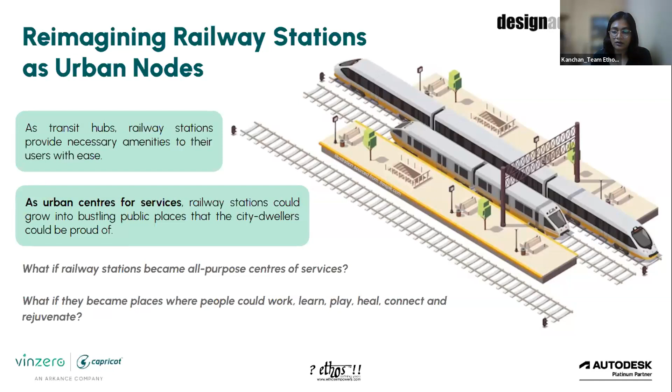Moving on, we have to reimagine railway stations in X, Y, Z cities, basically tier 1, 2, 3, 4 cities, though the nomenclature has evolved a bit. We have to reimagine the railway stations in our cities beyond being just transit hubs and more as nodes of urban activity. Because there is so much footfall and so much coming and going of all kinds of people from all different places throughout India, we have an opportunity to transform them into something that could just elevate the city into something we have never seen before.

So we fill in the gaps in the town's life with facilities such as education, healthcare, workspaces, hotels, leisure and entertainment related services, commercial developments, etc. For education, maybe we could imagine something like a night school happening there, or maybe even a regular school, college, or libraries. For healthcare, we could have full-fledged clinics or even hospitals that could work in conjunction with facilities like the Smile Train or the Lifeline Express, which used to run a few years ago.

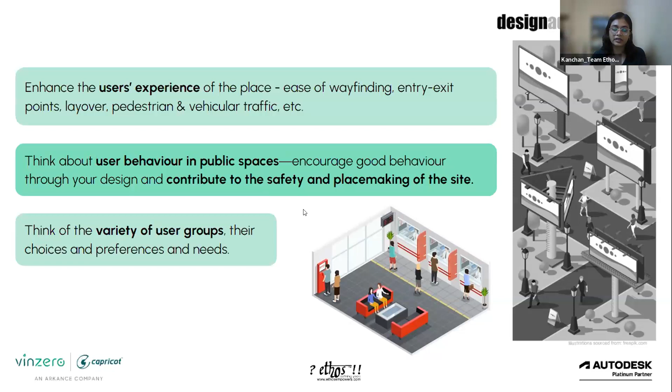Now, how do we enhance the user's experience? We discussed making wayfinding easy for them, the entry exit points and all of that. But we also have to think about how we can influence user behavior in such public spaces. How can we influence them to behave in a certain manner, such as maintaining good hygiene and not throwing trash everywhere, or making a place safe and accessible for everyone? What are the different user groups that will be using a certain space, and what could be their choices, preferences, and needs?

As far as the building's identity is concerned, we should try to encourage and adopt the local cultural heritage and the architectural identity of the place. Some places have a really strong cultural identity associated with their buildings. Maybe we could imbibe and embrace that.

You also have to always make sustainable choices, because sustainability is not a concept or an add-on, but a must for us these days. And these could be included in the project through walkability, net zero cycles for energy and water, and efficient management of waste.

Also, with this competition, you are allowed to define your own program and functions, such as what kind of activities you want to include. You could have only the hospital in conjunction with the railway station, or maybe a mix of everything at one place, which cements it as the go-to center for the residents of that city.

The spaces should be accessible and inclusive. No one should feel like there is a barrier to them, or that they are not able to reach certain spaces.

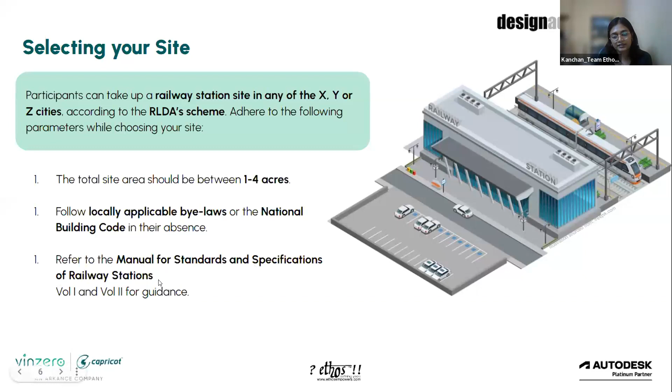For some frequently asked questions: is there any registration fee involved for the competition and workshops? No, there is no registration fee at all, it is completely free. Can postgraduate students take part? Yes, postgraduate students as well as undergraduate students can take part, who are enrolled in courses in architecture, design, or civil engineering.

Can the team members be from different colleges? Yes, inter-college teams, inter-batch teams are also allowed, and even interdisciplinary teams, such as at least one architecture student and the other two from different fields, either design or civil engineering, are allowed.

Can we define our own area program? Yes, we encourage you to develop your own area program according to the needs of the site that you've chosen.

In absence of local bylaws, which standards should we use? Like I said, the National Building Code is to be followed in absence of locally applicable bylaws and site regulations.

When will the workshops be announced? You will be notified via email after registration. So all the registrants receive an email whenever a new workshop is going to happen. So you should register now.

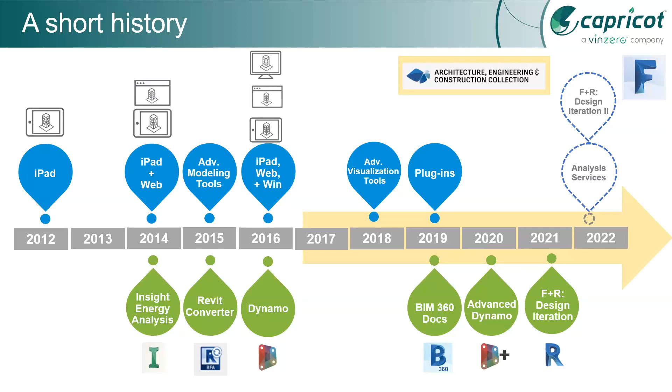So basically, who is going to utilize FormIt? Especially, as I said, in 2012 Autodesk launched the product meant with one theme - that the architect is going to conceptualize the thing from the initial period of our design. So the designer who comes with the sketching environment can utilize this product in the ecosystem.

Since you know that when you are going to design any kind of building, you'll have to design it conceptually first. So the first product that comes into our building life will be FormIt - the sketching environment takes place in FormIt. Then the second thing is informed design exploration. Now what do you understand by this? We know how our environment is going to be endangered by a lot of things.

So we have to cultivate some important steps for doing this. Analysis plays an important role here to compute your integrations, whatever design you are going to be presenting for your client. This third one is seamless integrations.

After the COVID pandemic situation, we all got to know that it would be very difficult to sit in the office and start the work. Earlier we were thinking it would be difficult to sit inside our home and do the work. Now the situation has been totally opposite.

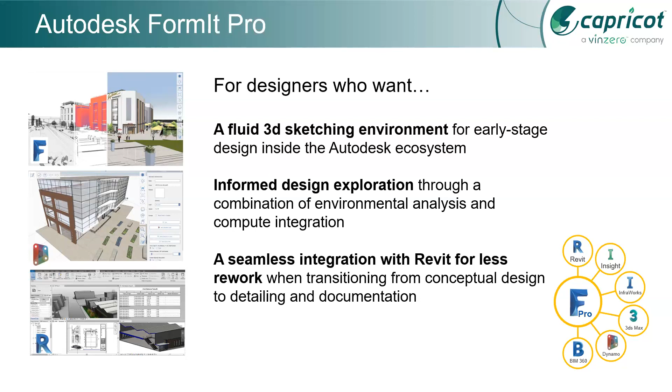So in FormIt 2022, we have a lot of things coming into our path. One is FormIt has been made available in many languages. Level transfer from Revit to FormIt is now possible. Dynamo integration with the 2.12 update is available. Dynamo length inputs units can be used. Since 2015 and 2016, Dynamo has been integrated with FormIt, but they have introduced some of the tools right away for length.

Now you can do animation plus video export here. Today, in detailed design, people are going to export high quality renders or high quality video animations.

But what if I want this in my conceptual design? In a conceptual design, somewhere on my screen, I want a video for an animation so that I can impress my client or my stakeholders to get them to invest more money into the technology, so that I can give 100% of my potential to my design. So animation and video are now possible inside FormIt, even when you are at the conceptual design stage.

So what are the things you are going to get here? You'll get advanced modeling. You'll get environment analysis. You can get FormIt plus Revit integration. You know Revit is a far wonderful product, so it's going to come with FormIt with a whole bunch of BIM.

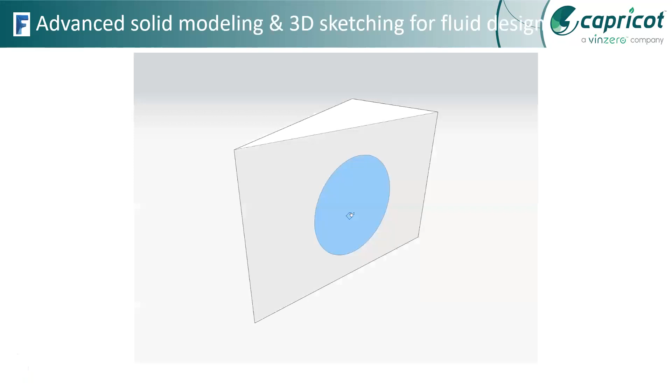For example, if you want to make a circle or a little bit of a push pull, you can do it with a very additive and subtractive mode. You can see how easy it is to do this with the subtractive or additive part, right? It can make multiple push pulls very quickly.

It can do solid modeling like 3ds Max or Revit. It could be much easier if you want to cover some shapes or make some unusual surfaces. It can be done very quickly. And the user interface reminds you of doing conceptual modeling inside Revit.

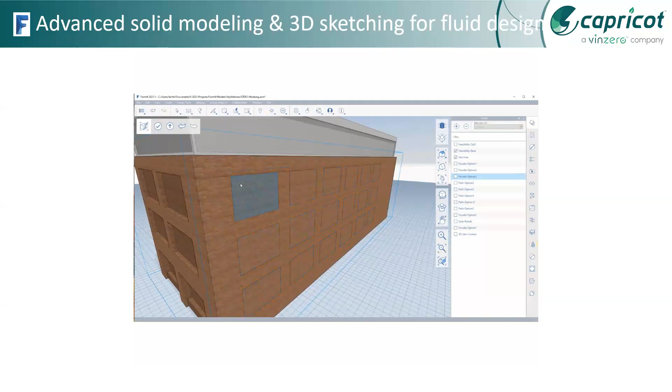If you talk about the materials part, material is going to make here multiple segments. You can just right click and the normal tools are on your screen, as you can see right now. Automatically, you can make a push pull with a quick and easy mouse movement.

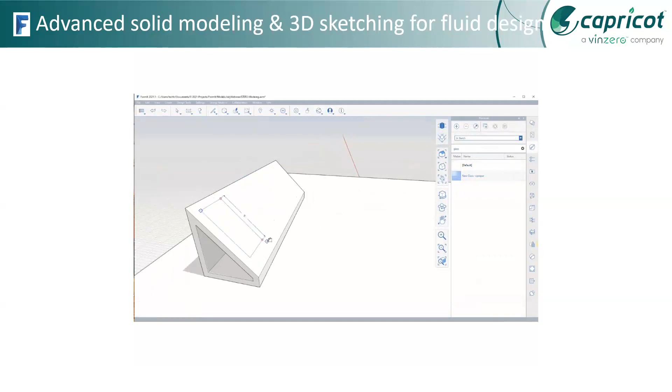Even if you're going to talk about layers, dimensions, or some unusual shapes by making an offset array, that could be possible. Like one of the groups you've created, if you wanted to make multiple elements through the array command, you can do it. Mostly we've seen some products really utilized and hung when it's done with the array.

But over here, it's going to justify that the array can be done very quickly, right? Since it's a product of Autodesk, the array would be a great extent mode. When we talk about extruding at different angles, it can be done. When we want to create a shell thing, that's also possible. There are a lot of things we can cover in Boolean operations: adding, subtracting, union or intersect. All those things are possible.

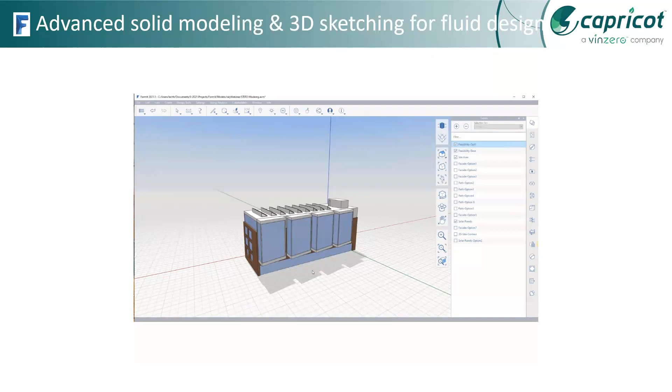When I say there's a Boolean operation, it means that whenever any software comes into a Boolean operation, it can do anything, right? So now the terrain thing.

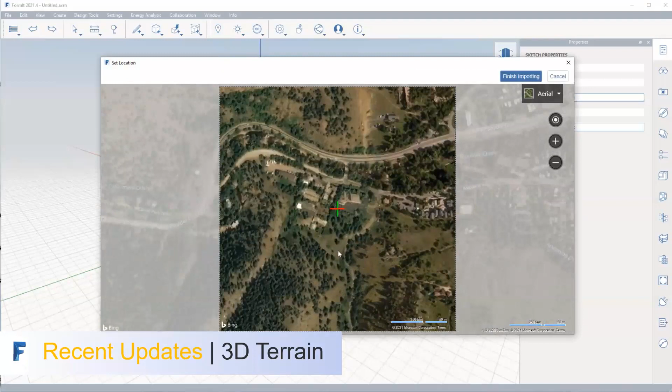Whenever we want to understand the terrain part, we have to come to one software or product, that is Google Earth. In Google Earth, we take all kinds of coordinates, but over here you just type your site and automatically you'll get the terrain part.

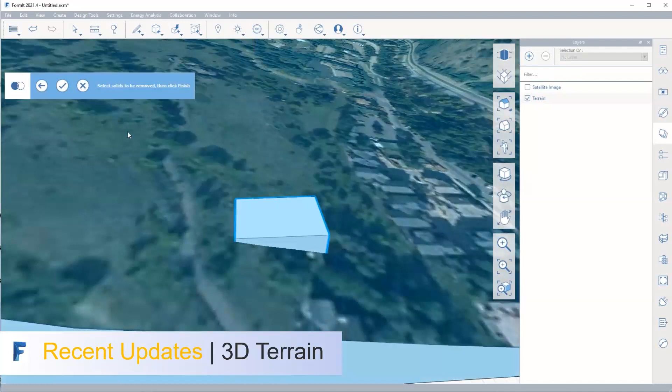Even for the best part you can do this for conceptual work. I can't say it'll be as detailed as you want in detailed design, but yes, for initializing your sketching and your conceptual design, the terrain is really important for making your design. That input you can get very easily just by typing your site, and you get terrain data very quickly. I know there are a lot of questions coming up here, but I'll take those after the slides.

Okay, so then let's cover the next part. So you found that the terrain has been covered enough.

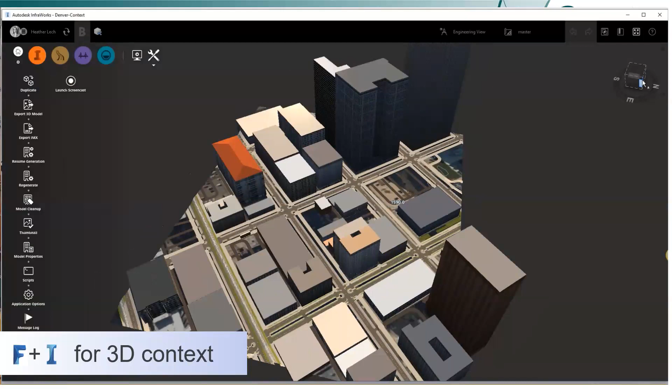Now, if I'm going to cover FormIt Plus analysis, we call it Insight Analysis. Once you've given data of wherever your site is related to, it's going to be contextified through InfraWorks as well. InfraWorks is one of the software really utilized for the construction field environment.

Now, if you require a conceptualized model depending upon the site, like this is one of the sites we have to conclude into a design, you'll get normal kinds of blocks for the conceptual design. All those blocks can be exported, and they help me while delivering my conceptual design, because I want to create the concept of my building, not the other side of the building. So for shortening my time or timeframe, I can import 3D models related to my site location.

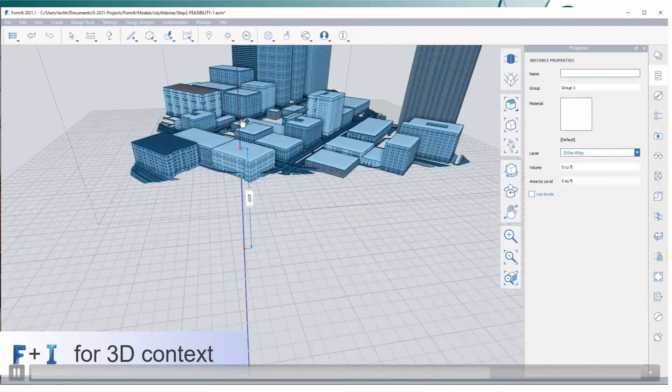I can just import that model, and within a fraction of time, I'll get reachable components, reachable blocks. So now I'll have a proper sense of what different heights my site area has, what design I can go for accordingly considering the other side of the building, and how approachable the road is to other buildings as well. So this is what InfraWorks can help you with.

Especially if you're designing in this area, it helps you make and change your access accordingly. Because when working on FormIt, the building is in orthographic projection. But when you get the site location, you automatically know the area, the length, the angle, the bearing part. So this is really helpful for conceptual design to get the other site model as well, so you don't need to create the environment before making an animation or a render. It removes the guessing work, it removes the Photoshop work, which we call post-processing.

Now, environmental analysis. This is my favorite one. Why? Because environment is going to be created through a lot of input data. Whatever data we provide, it's going to be responded back to us.

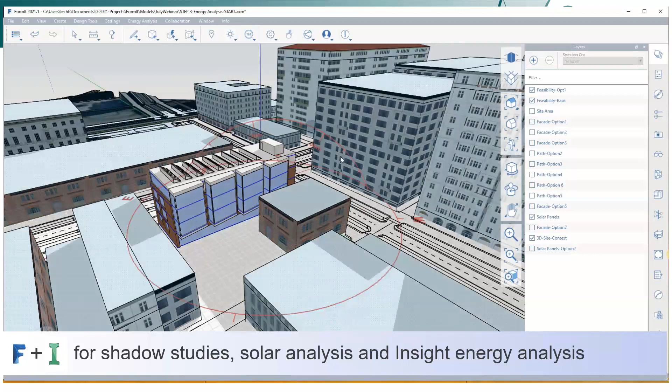So once you receive the model, once you receive the site, you can generate your solar study, you can do a solar analysis, even an Insight energy analysis. I'm not saying it's going to be a detailed analysis - detailed analysis can be done in Revit - but you can do a conceptual analysis for the energy.

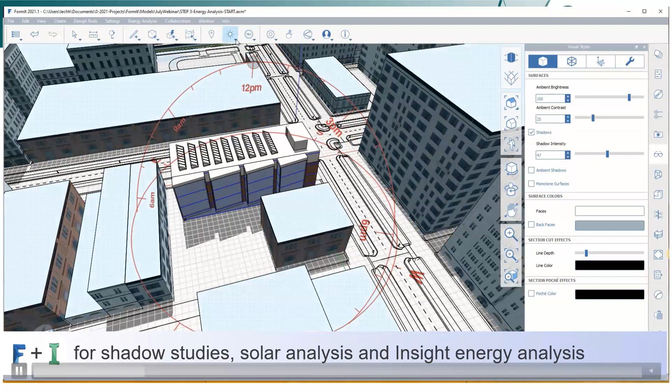Now, once you're satisfied with the site, the location, the time, the zone, it can give you data for the solar studies, the solar analysis. Within a click, you can find what the heat range is during the month, during the year.

You need to select those panels, you need to select that surface area. From that surface area, you can know where the solar shadows are going to be portrayed on your surfaces, or you can get a year cumulative analysis.

Once you run this, you find that the energy optimization according to the heat gain for your surfaces comes through very quickly. Even if the analysis is satisfied, you can change a lot of different methods, do a lot of design iteration so it can come to a next level or range, so you can save those surfaces, save that space through the inside or exterior environment.

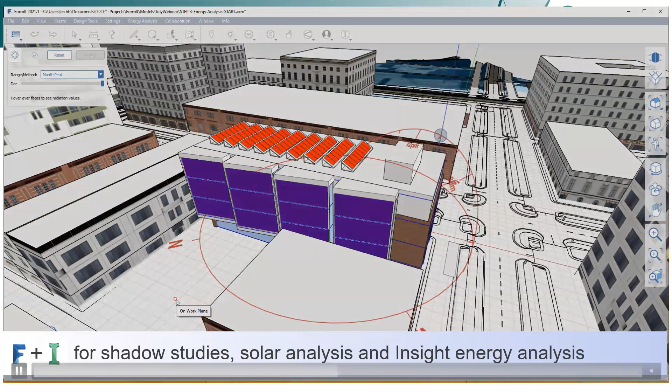We'll also have one more module called Insight. Through that Insight, the model is taken into the portal, which gives you the energy benchmark for comparison.

Now you can see on my screen a lot of good representative methods are being showcased - what can be good for this building, and what design things you can change to make this building give you a good result. You can go according to lighting efficiency, window materials, operating schedules, and it's going to calculate the load part and HVAC part.

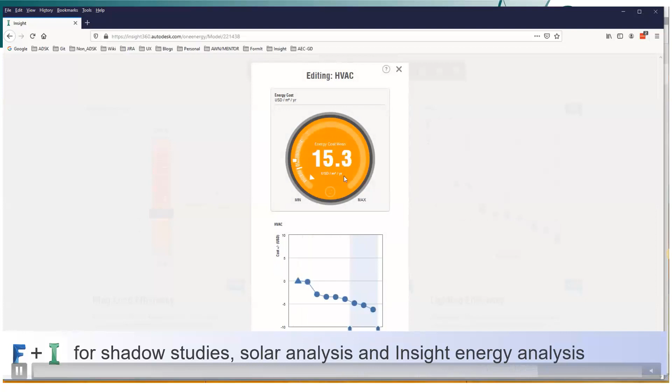So every time you get a result from that cumulative kind of data, you basically know about your site area, the negative parts, the positive parts - cumulative data, getting all that into the back end, you'll get a good design.

On the back end, some software, some technologies are helping you - this is what we get from the data, whatever input you have given. So if you utilize that data, you're definitely going to come up with good designs.

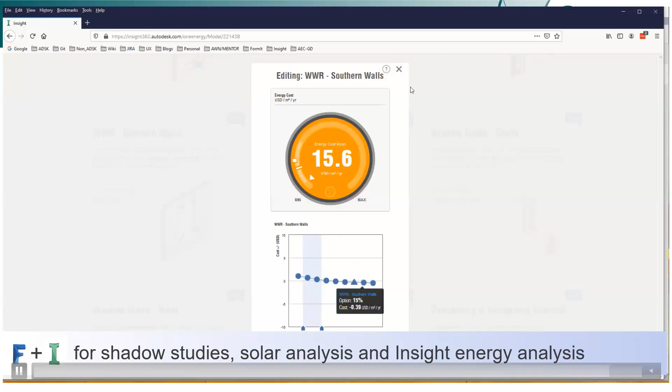Nowadays I've seen a lot of people doing competitions getting good results. Why? Because they're using technology, using data that has been made accessible very easily through software. That's why you can increase potential through productivity and technology wherever you can reach.

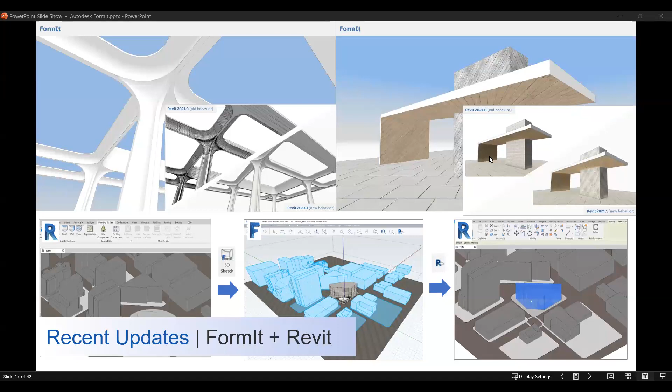So now through FormIt, you can also bring your SketchUp models, and FormIt models can be brought here as well. This is one example. We have taken two examples, one for an external facade project and one for an interior project. This is Revit's interface.

Let me pause it. So this is Revit's interface, and here under massing and site you have this option where you can push your model to FormIt. So conceptually, site context has been developed and it is now brought into FormIt. This is FormIt's interface now.

So after bringing it into FormIt, a conceptual shape has been developed, and multiple levels are added to it, because obviously a building would have multiple floors. Level-wise, as you may notice on the right side in its properties, this is the FormIt interface.

Here you may notice that level-wise, it also calculates the area. It is in square feet here, but you can also convert that into other units since it works in dynamic units. So you can also keep track of your FAR in that case, right?

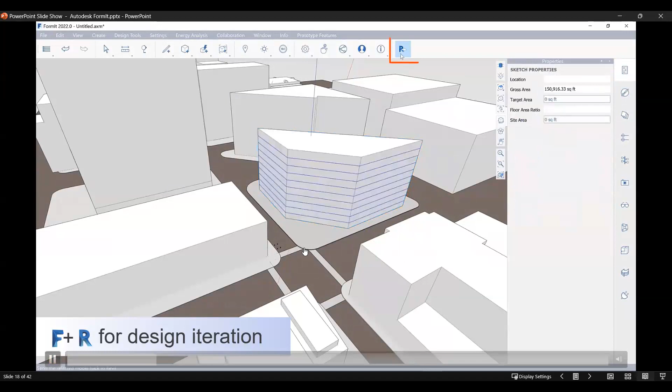So once a conceptual mass is developed in FormIt, you can call it a conceptual form or mass, and that mass can again be pushed back to Revit using this option. It will take all the materials and other properties of the FormIt model as well, and now it is brought back into Revit.

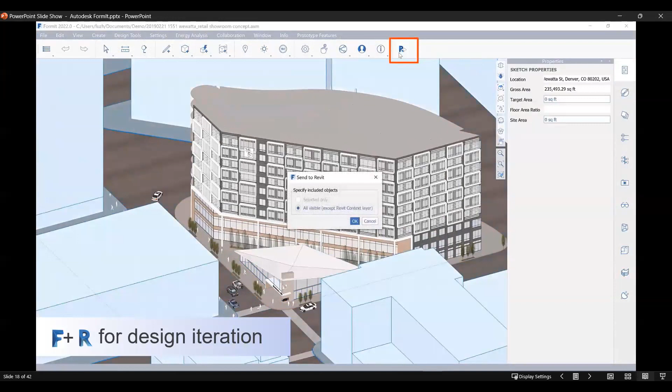So once it is brought back into Revit, you may notice here that further details are added to it in FormIt as well, and it can be further pushed to Revit. So either you can bring a conceptual model, or you can detail the model entirely and convert that into a Revit model.

So many people are still maybe learning Revit, and they might not be able to detail every component. Although Revit is quite comprehensive software, it gives you all the options to develop any shape and form, but obviously practice is needed. So those not very comfortable in Revit, especially when working on this design competition, may also take help from FormIt.

You can detail your components like this person has detailed his windows and other facade elements, and then it can be brought back into Revit for detailed design, because Revit will be used for getting quantities of building components, developing working drawings, and presentation drawings. So drawing creation can be done here.

As you may notice here, we just opened the material browser, and under it FormIt materials are also available. So whatever materials are applied there are also available in Revit. You can make changes even in FormIt, and since it's a FormIt session, we are making changes in FormIt again, but you may also make changes in Revit directly.

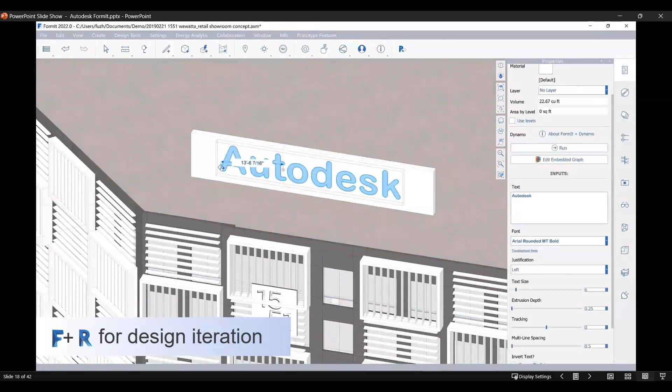Whatever changes you make in Revit will also reflect back in FormIt. So it's a to-and-fro kind of support, and interoperability is quite good in that case. This is one sample project from Autodesk. This is another example where we took a sample project, also from Autodesk itself.

In this project, we tried to develop interior design using FormIt. Although Revit has the capability of delivering good interior projects, if anybody wants to use FormIt's modeling ease, because it's easier in FormIt to sometimes develop shapes, it depends. So now this portion has been cropped in Revit.

After cropping this portion in Revit, you can select it and export it into FormIt. So this is also doable. Rather than pushing the entire geometry, you can select a room or selected geometry and push it back into FormIt. So now this portion has been pushed back, and a reception table has been developed here.

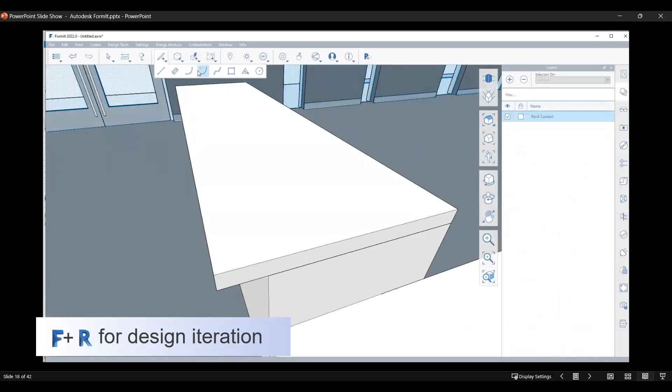So it is quite easy in that sense. As you may notice here, modeling is quite easy, and it has been extended further.

A curvature has been added now, and then materials will be added further - support and then materials. So after addition of the material, ceiling components are being added in FormIt, and whatever is done here will be reflecting back in Revit as well. All of these components are modifiable in both softwares - you can modify them in Revit or in FormIt as well. So the interoperability is good.

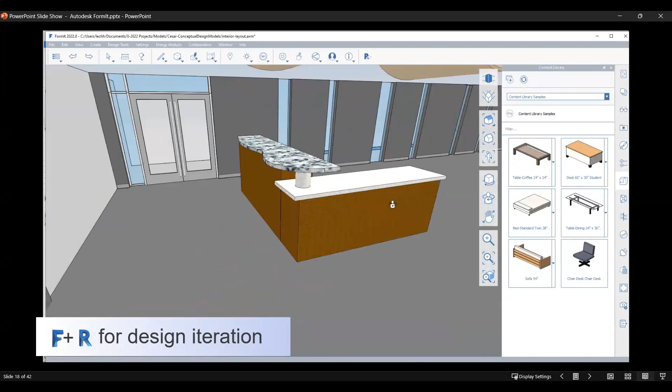Now it is pushing it back to Revit, and as you may notice, components are available in Revit. In Revit, you can also get the material based quantity. Material has been added already in FormIt - marble has been added there, and in the ceiling, some wooden finish has been added. If you need to get quantities out of it, Revit is good enough for getting the quantities.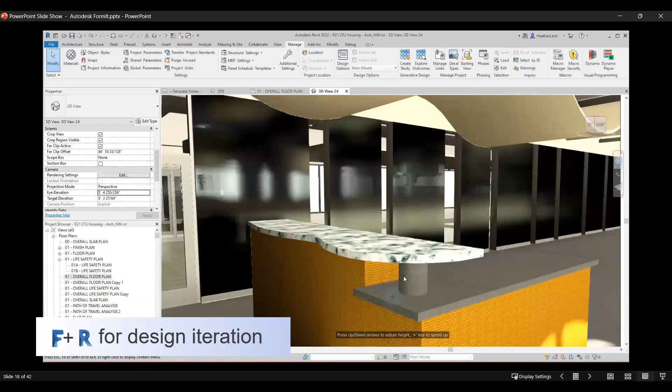So if anybody is not very much comfortable in modeling in Revit, they may also take help from FormIt and can push their models into Revit. Then quantities, working drawings, sections, and details can be figured out in Revit as well.

So this was one example from the interior project. I think I'll also ask Mr. Munith to take the session forward again to talk about the design coordination part of FormIt.

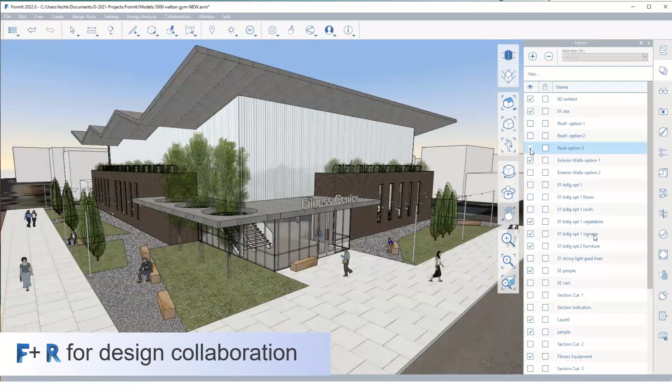Okay, so now as we have understood that collaboration has been very much needed - collaboration means nothing but different persons and different stakeholders or consultants are going to work together. And you know that when we are working together, there's a lot of confusion and quick chaos, right? But how we are going to reduce it depends upon what technology you are using.

So over here we are having design collaboration when you are working within a Revit team as well as working with FormIt. The materials you get over here directly - whatever you have placed inside FormIt comes into Revit, so whatever effort the FormIt guy has done is going to be helpful for the other guy who's working on the Revit side.

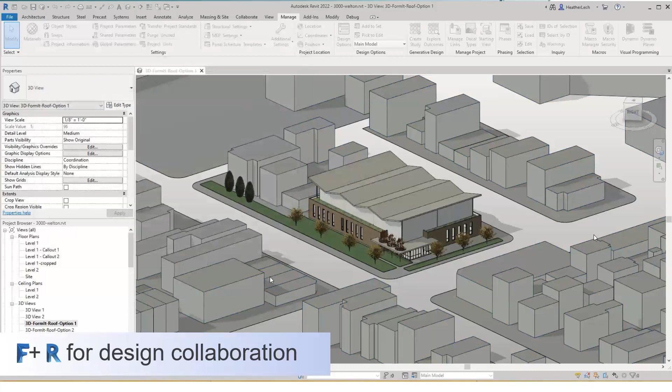So you can utilize the materials, you can utilize the mass family as well. You can apply the walls, floors, roof, or any kind of FormIt faces. With the latest software, you can send the same model - whatever you have in Revit, you can directly interoperate to your FormIt as well.

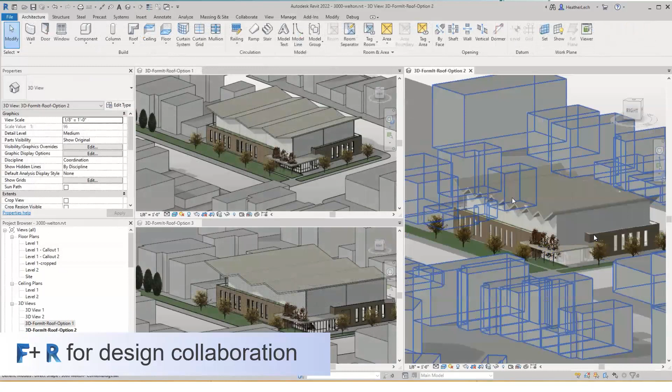So FormIt is also going to open and Revit is also going to open side by side, and you can change whatever changes you would like to make in the FormIt part through a designer.

Even when we talk about real-time visualization, it will be the biggest headache for visualization or for an architect. Why am I saying this? Because when you talk about visualization, there are a lot of softwares, a lot of technologies, a lot of investment an architect should do for making a high realistic rendering. You may have encountered top softwares like Lumion, which has really trending based technology.

But what if we get real-time visualization here that makes the client happy? Whatever material work is done, it's going to be helpful for both FormIt and Revit. If say 30% of the work has been done by a FormIt guy, it will be reutilized by a Revit architect or designer - he can utilize that 30%, meaning he doesn't need to start from day one, he invests after that 30%.

So you need to know that whatever the FormIt person has done throughout the number of days, the person working within the Revit team is going to take that legacy and start working after that point - meaning after those hours of work. So the work is going to be utilized through the materials.

More importantly, when you present the data through FormIt, it's going to give you real-time visualization, just like watching smooth animations. I'm showing you this in terms of export through the model, providing an instant review—you don't need to wait for the rendering part. It's real time.

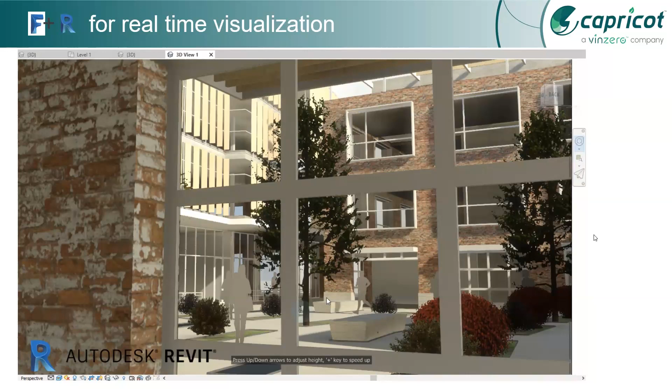Right now you can see in the small left corner the brick showing a rusty look. So you can figure out this is a rusty look, and for an architect or a visualizer, this could be the best part for conceptual design.

So I request, sir, for the FormIt Dynamo.

Okay, thank you. So Dynamo—some of you might have already heard about it. It's a computational design tool. What is computational design?

For those who are not aware: basically when we draw anything in AutoCAD or any CAD-based software, it merely helps us by providing a digital pencil. So CAD is basically a digital pencil, but we are not utilizing its full potential.

If we draw, let's say, two lines and mention that these lines represent a wall, or maybe pipes or ducts, that needs to be specified by the user. AutoCAD or any such CAD software will not be able to process that data—it will process it as a line. So if you draw a line in CAD and select it, it will show you the properties of the line.

But in Revit or any 3D software that supports BIM data—Revit is one of those softwares—it actually provides information about the component. So you do not draw two lines there; you actually draw an entire wall, pipe, or duct. You do not need to specify lines here—lines will be the output for the component. Once you draw a component, lines will automatically be generated out of it, and drawings will automatically be generated.

So that's another level of using the computer's strength. The computer's strength is not in providing the digital pencil, but in computation. The computer, as its name suggests, is used for computation, for calculations, right?

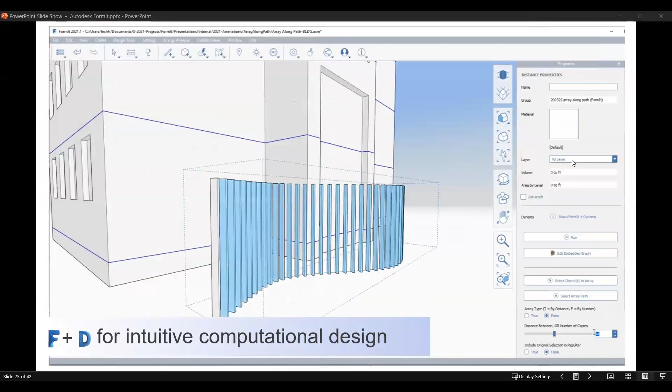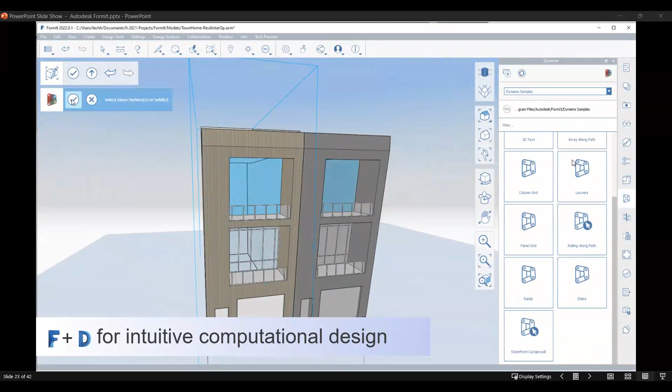Once you go to the interface of FormIt, on the right-hand side you'll find Dynamo support, and you can use some predefined scripts. If you're familiar with basic programming—visual programming—or by the way, it supports Python, so if you know Python well, you can create your own programs. I'll show you one live example where we try to develop a program in Dynamo, and then we can push that into FormIt to be used for detailed design.

In this particular case, it's one of the predefined scripts which this person is running, and some parameters can be modified along the way.

So let me share my FormIt screen. Just a minute—so this is the FormIt screen. I think you can see that.

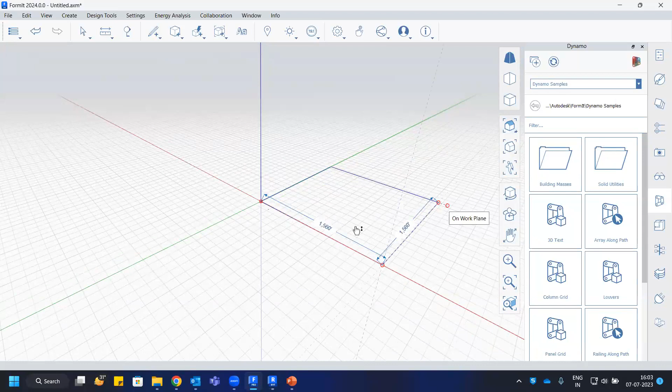I'm just showing you some live elements. You can obviously take up sketches on your own and draw a few things—I think Munisar can show these parts better. But the idea is you can push and pull the elements and draw anything. Rather than drawing it manually, you can also take help of Dynamo scripts.

On the right-hand side you have different tabs, or you can call them panels. This is the properties palette, this is the materials palette, this one is the layers palette and levels palette. So you can explore different palettes. One of the palettes is actually dedicated to Dynamo, where you have some predefined scripts, as you may notice.

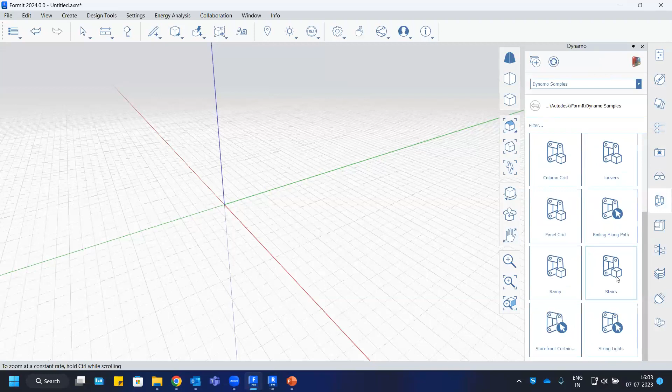So this script actually helps you, like sir was mentioning, to array components on a path, so that will be lighter to use. Or otherwise, like I'll just take up the stairs component, click here, and it will create a stairs component. Sorry, there's a scale issue. Anyways, so in this case, stairs are automatically created. If someone has to model this stairs in Dynamo or in Revit, it takes a while to figure it out, but by using the script, it automatically created the stairs.

What you can do, you can just maybe control it by some features, such as you can remove the top landing, or remove the mid landing if not required. Although if I, for example, remove the mid landing, it will run the script again, it'll start reading the Dynamo information, and automatically change the mid landing. As you may notice, now it's a straight staircase without the landing. If I add mid landing and then run the script again, it is running the script in the background.

So let's say I'll just go for 8 feet stairs. I'll change it, suppose it's a public staircase, 6 inches is the height, tread depth is 1 foot. I think it is fine, and there's no overlap in the treads, and everything is fine. I can just make changes and run the script again.

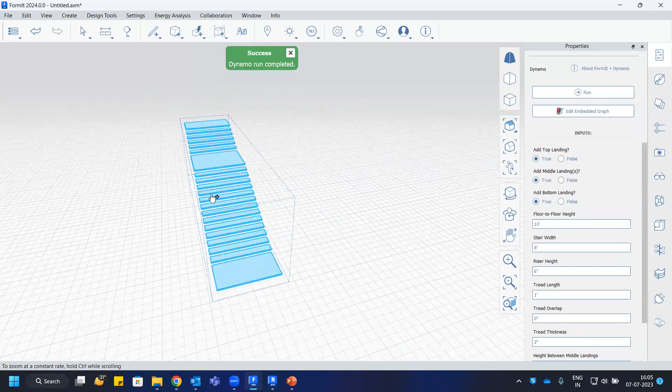As you may notice, for 10 feet it is created, but for some reason I think this mid landing might be readjusted. For example, I would like to place the mid landing somewhere in between. I can also control the height of the mid landing, that is at 7 feet in this case, so that it provides the headroom.

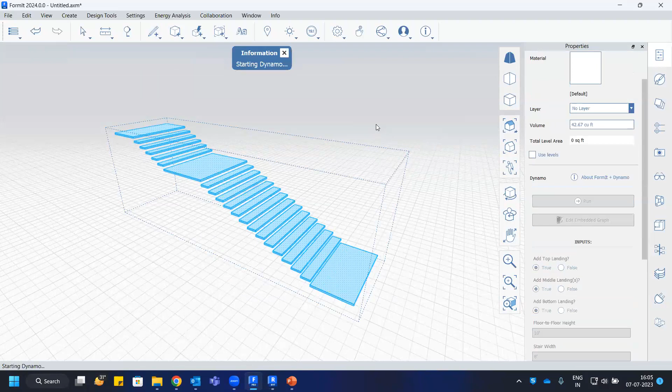But for example, I'm not concerned about the headroom, I can just keep it not at 7 feet, but let's say 4 feet, for example. Sorry, mid landing 4 feet. So whatever changes you are doing, those are actually being automatically considered. So it is working like a plugin now, right? So I hope you got the idea.

So now further, if you are familiar with programming and interested in it also, you can simply edit the embedded graph. If I click on edit embedded graph, it opens in Dynamo. This is the Dynamo interface, it is opening, so this is the launch screen for Dynamo. And you can make changes there as well. So I'll launch the Dynamo.

Obviously, those who are not familiar with any kind of visual programming, it's easy, although they'll need it, it'll take a while. Just a minute, it is opening. So for those who are not familiar with the programming, they need to learn it, but yes, once it is learned, it is quite easy to execute. So this is that program which is being run here.

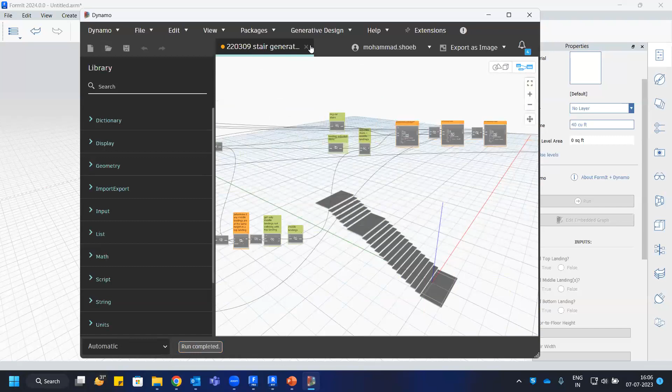So similarly, I also created one program. I'm just removing these stairs thing, okay, I'm just removing the stairs. And it has already converted into a component, as you may have noted, you cannot select individual components, it is converted into a component thing. So anyways, I'll just zoom out.

Now, for example, if I need to create some wavy shape, obviously straight components, like linear components, can easily be created directly into FormIt, like blocking can easily be done. But suppose if you have a wavy shape in your roofs, for example, a parametric roof, something like that, in that case you can take help of Dynamo also.

So let me launch Dynamo. If you do not want to use these scripts, you can simply launch Dynamo from here. I'll just launch a new Dynamo script, it'll open the last used scripts mostly, so I think one script will automatically open.

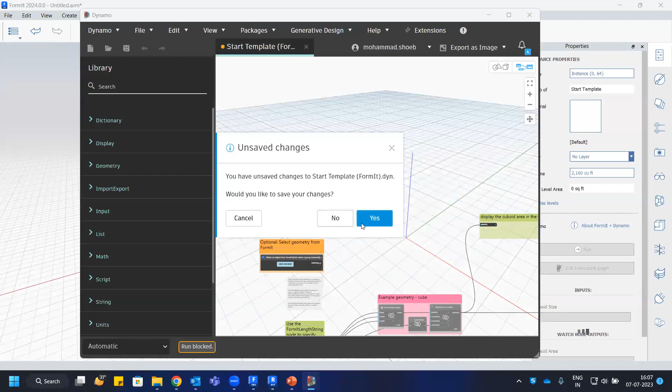So it is opening. This is the interface for Dynamo. I'll just close this script, it wasn't saved earlier, so it's showing unsaved changes. I was trying something else, I'll just delete that. Anyways, Dynamo lets you start a new script, and you can navigate through the library to get different geometries, which will reflect back in FormIt.

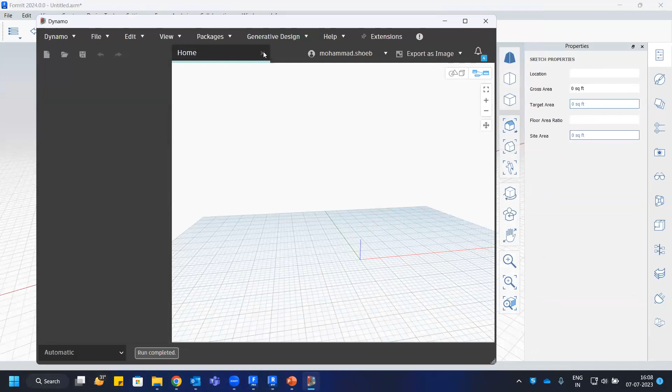Since time is less, I'll take up one of the predefined scripts. This was created by our team for developing wavy shapes and adaptive surfaces, which you'll need for creating roofs in railway station projects. So such scripts can help you. I've taken a roof structure, and I'm not connecting it for now.

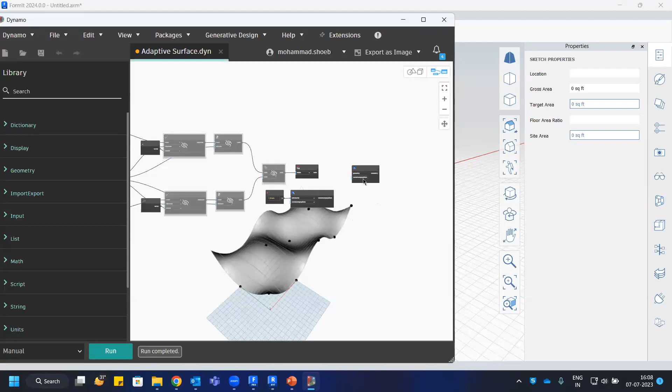I'll make a few changes here, and give some thickness to the surface. If I directly connect it here and run this script again, in the background you may notice... I'll zoom to fit. Okay, it's still running I believe. I'll run this script. Did I connect the correct node? Yeah, it has created the surface.

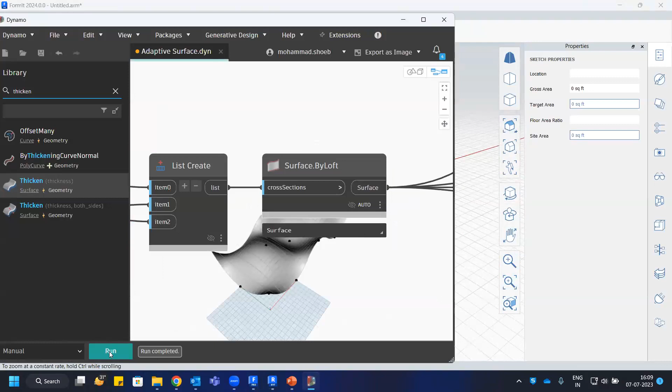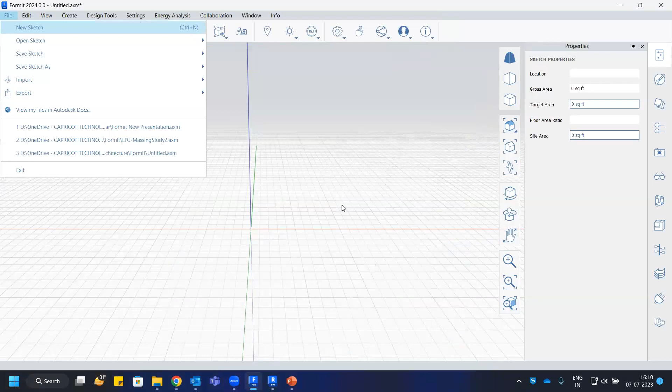What are the units? It's feet and inches. Just a minute, I think something went wrong. Let me close Dynamo. Yeah, there's some warning. I'll just open a new sketch rather, not saving it. And that's launching Dynamo again.

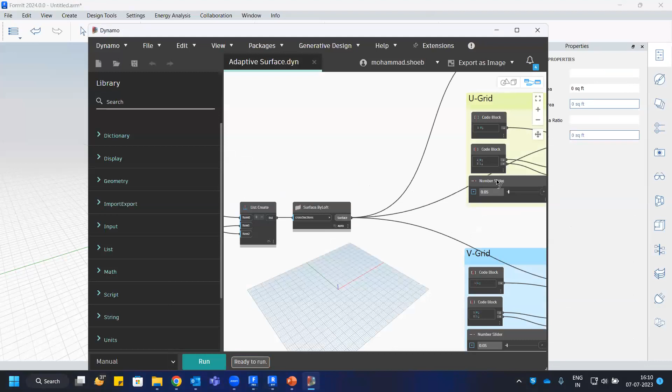Let us try. So that surface has been created inside Dynamo, but if you need to take it into FormIt as well, you just need to reconnect it. I'll run the script. Anyways, it is created here, it's saved as mesh. For some reason I'm not able to bring it into FormIt. Anyways, sometimes it happens, I'll improve my script, no issues. But if I connect this solid geometry to it, I think it can work.

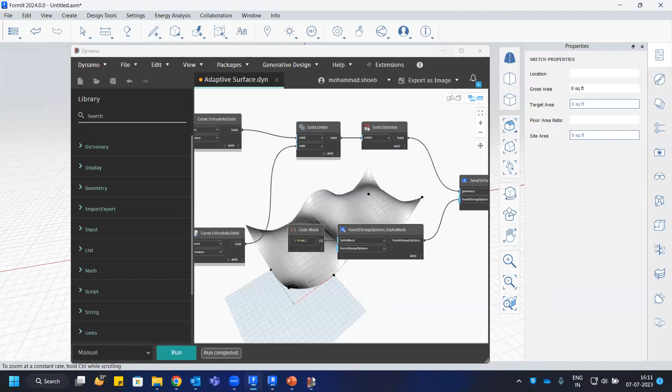The staircase script was working, but it's not working now. No issues, but the idea is, let me change the imperial units to inches. Sometimes it also makes issues in inches. 30 by... 5 by 5, for example.

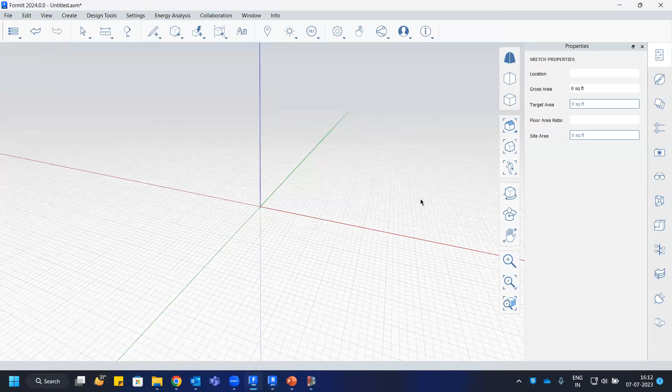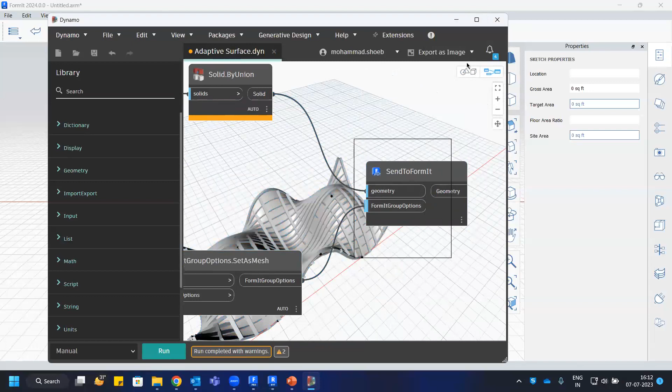No issues, so anyways, obviously need to improve the script here, but yes, that component has been created in Dynamo. You can translate that into FormIt, and whatever changes we make will be updated there. I added some frame as well, and it can be converted to send to FormIt. So this node wasn't working, but earlier I tested it and it was working, no issues. There are some issues here, I'll remove these warnings, then it'll work.

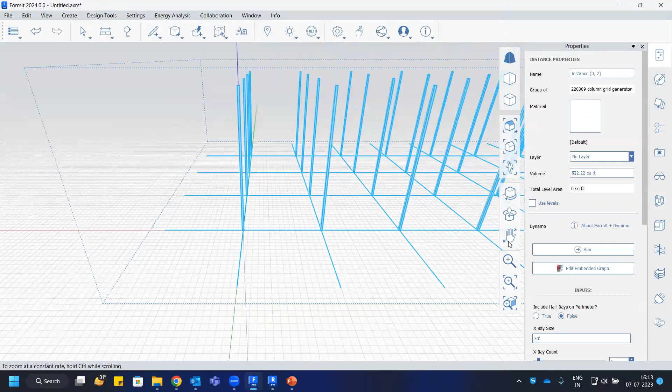So the idea is, if you have hands-on experience working on a script, you can create your own scripts then and there, and it'll give you the result. And if you need to use the predefined data provided by Autodesk, you can simply go to this section of Dynamo and use some predefined scripts, like the stairs script I already showed you. Similarly, ramps can be created, grids, columns, and this can be easily done. This is a grid for columns, and you can change the embedded data here. So I hope you got the idea, that FormIt also works along with Dynamo. Earlier there was no support of Dynamo, but now Dynamo support is available, and you can push your creativity to another level if you learn Dynamo well, and also get good results for the computation.

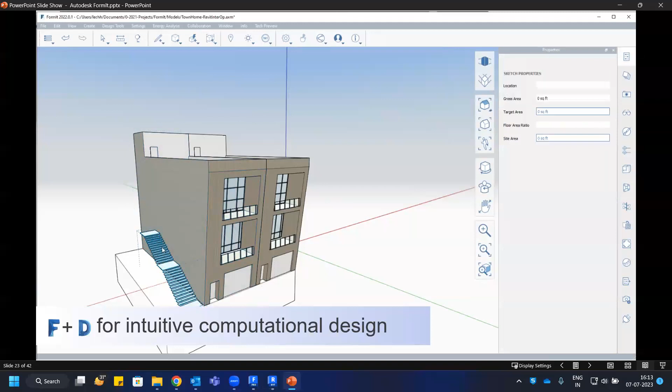Anyways, I think I can now ask Sir to discuss about the analysis part of it. So you can run energy analysis here as well, like solar analysis, or solar radiation analysis, or other insight related analysis. So Munish Sir, I would request you to take up that session, and energy analysis can be shown by Munish Sir. Over to you, sir.

Okay, thank you. So right away, I'm just sharing the screen. So basically, like what we have learned so far, when it comes to the analysis part.

So from here, once you develop the model, you run the solar analysis. After the solar analysis, you're going to have an energy analysis.

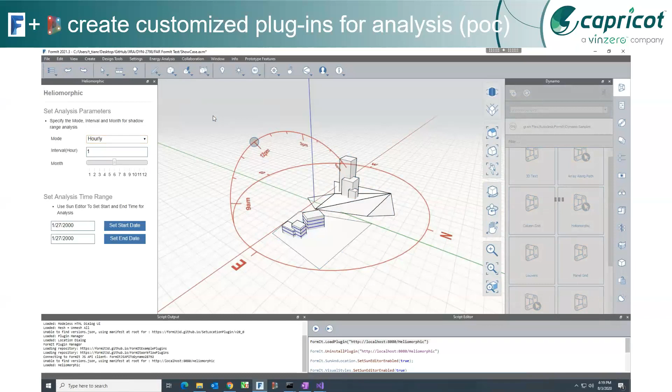For energy analysis, there's a special plugin, the Heliomorphic plugin, which is defined with the mode and the interval of the hour, even though for the month as well. We have 12 months.

So according to it, there are additional plugins always required for the software, but FormIt has independency in its product. Basic analysis can be done on its own.

So now you can see whatever plugin can help you out, you can install it very quickly. There's site data according to the north condition given to you according to the material. Even if you want to set analysis for a time range, it can give a brief introduction for what and why you are going to portray your design.

After creating those analyses according to the images, you can export it and put it into the presentation to show how things work if you change your design. So you will get two analyses here: one is solar analysis, another is energy analysis itself.

Even if you want to go in-depth with new things for detailed analysis, there's the Heliomorphic plugin you can introduce, and you can get whatever results you need based on the data you've provided.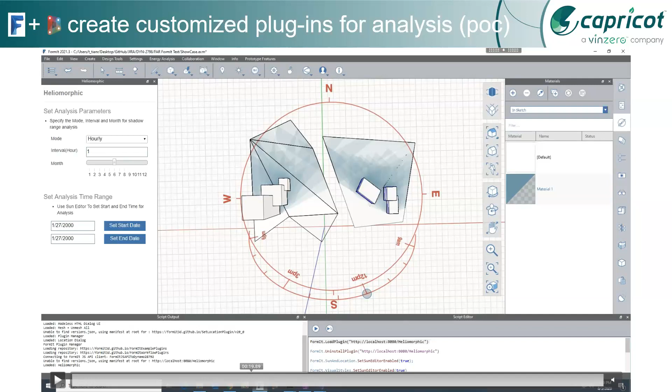Now let's talk about performance. You've understood that within this field, performance does matter. Performance matters for your incentive, for your product modeling, everywhere performance is going to be maintained. So what about the software?

There are a lot of situations catering to productivity, where we introduce FormIt, Revit, Dynamo, and the visualization part. How much performance is given back to us?

Now if I come to FormIt, once you're introduced with it, there are a lot of things you encounter: navigation, group operation, selection, pre-selection, creating and editing. All those tools are going to be faster, because performance is about speed.

The more fastness you work with, the more productivity you showcase to senior management. Once you understand the other tools you've been using for long, you can compare that product with FormIt.

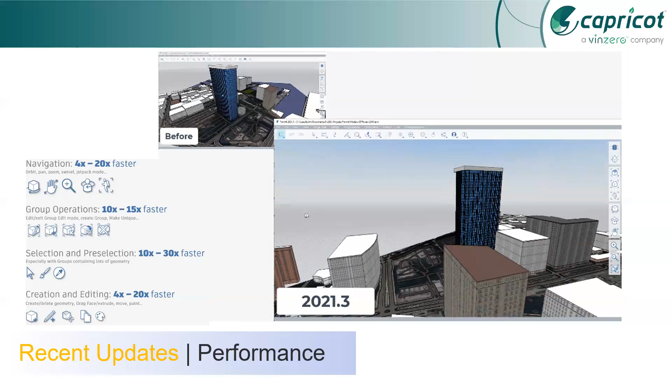With navigation and group selection, many times you've seen that while editing groups, the model hangs around. But when you encounter FormIt, you won't feel that.

Now, if you have a certain format file size, let's say on the left hand side I've given model 1 to model 5. Starting with 0.25, what is the performance improvement? It's going to increase 10 times.

If you have a 230 MB model size, it's going to take 152 seconds. That 152 seconds means it's imported through or exported to CAD. The performance is measured through the interoperability.

Once you do the task from one software to another, how much time does it take to compile your work quickly? Are you going to wait a couple of fractions of a second or many minutes? If you're sitting around with nothing to do with your software, you're going to feel the software isn't working properly, or think the system isn't working properly.

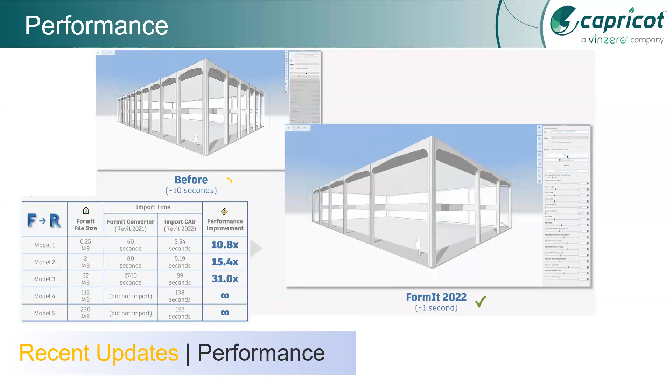So here you found that this has been on the Autodesk side, this is the performance improvement. It means they've already done a lot of analysis on how the software reacts when it comes to interoperability with other formats.

Now, FormIt Autodesk Docs. This is a very essential part. Nowadays, in the ecosystem, we have a lot of projects to share with the team.

When we are going to do it without the Autodesk Construction Cloud, the rest of the project information is going to be dropped down through the drives. But over here in the ecosystem of Autodesk ACC, you can share your model and you can share the information which is going to be accessible by the whole team from any location.

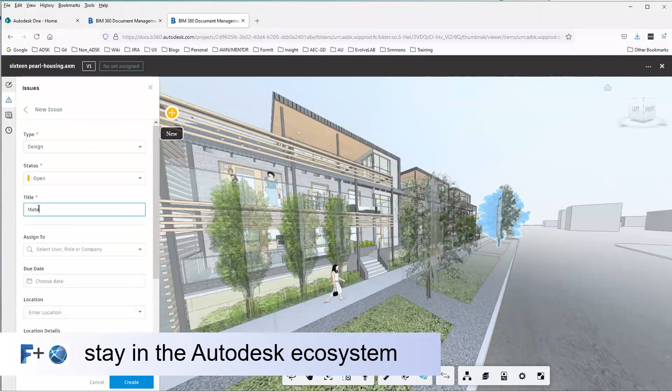If you're sitting in Hyderabad, Mumbai, or Gujarat, everywhere you can fetch your information from the respective consultant, even if it's not already there. Sometimes you want to do the model itself. So if somebody in the Hyderabad team wants some design changes in the model, they should be able to do it.

So you can make those design iterations. You can see there are a lot of issues. You can mark it over here - material check, road plane, satellite, existing floor plates. So you can give your feedback, mark issues over here, for whoever is associated with this product, this model, or this project.

You can give those issues to an assigned person to change this part. You want to see the interior position, some of the landscaping elements - you can directly see it from the web server. So that will be ACC.

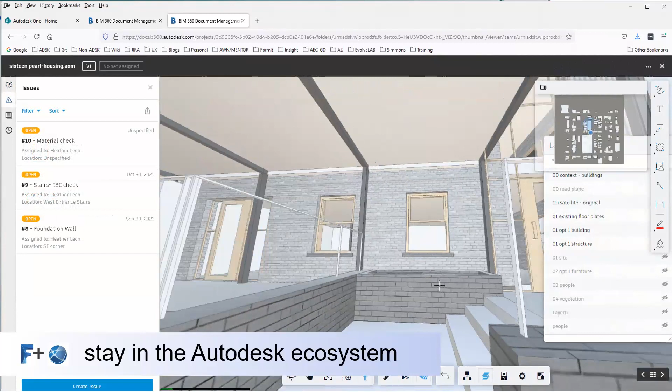ACC will help you in sharing your data, working in collaboration, so that the other person is helped when operating on one model. He doesn't need to send any emails. You can directly open your portal right over here and directly access your model.

Once you access the model, you can get a lot of things over here to change your design, to discuss that with the team.

Now coming to the last thing, customer examples - we have made here a very big image of what FormIt can do. I know most of the people in this presentation know what FormIt is all about. But normally people have a myth that whatever thing we are presenting to you, is it really so, or is it a little bit downgraded or probably upgraded?

So let me show you some examples of what people throughout the world are using FormIt for. See, this is one example. In FormIt fluid 3D sketching, you can create a lot of environment, a lot of complexity as needed. You can see the real-time design over here.

This is not something I made, or somebody made inside Photoshop. This is a live example. You can go and search in Autodesk - people are using a lot of Autodesk FormIt.

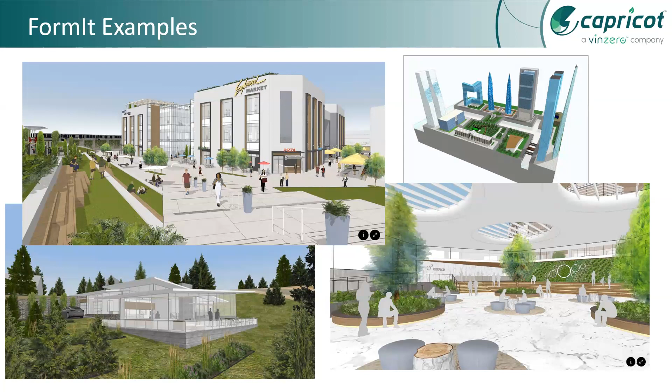So FormIt has now become a new technology that people are using, persons like White Architects. White Architects have utilized it throughout their office in Northern Europe, even in Sweden, people are using FormIt and building designs within FormIt.

They came up with a quote that they thought it was really fun to use. And they've enjoyed it, and they also talk about the interoperability - interoperability here connects with Revit, because Revit does support BIM.

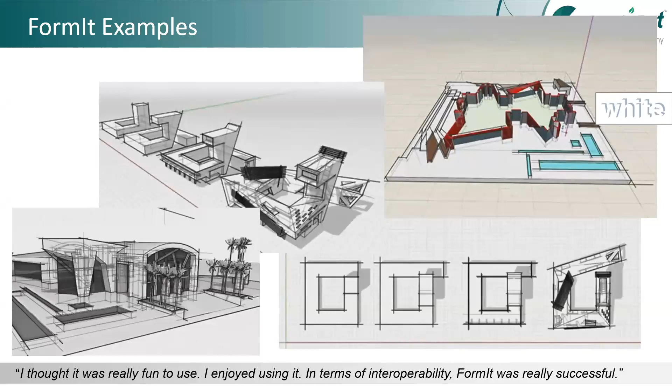Then there's a prestigious firm called Array Architects - they are also using FormIt. They have done a lot of wind analysis, energy analysis, solar studies, and they are focusing on their architecture as well as facade work.

So they came up with the same project with the facade part. For the facade, they wanted to do a lot of changes, like Shoaib sir explained how Dynamo is interoperable with Revit. Similarly, Dynamo is also interoperable with FormIt.

You can see the changes - what if you wanted to go with the first option, what if you want to go with the second option? These are changes you can only do with the Dynamo thing, because these are situation-based programs.

Now, a situation-based program means you're going to have a dilemma - either you go with the first option or the second option. There's no kind of analysis needed for the first option versus the second option - you just want to see the result. And when you want to see a result, you definitely require an algorithm.

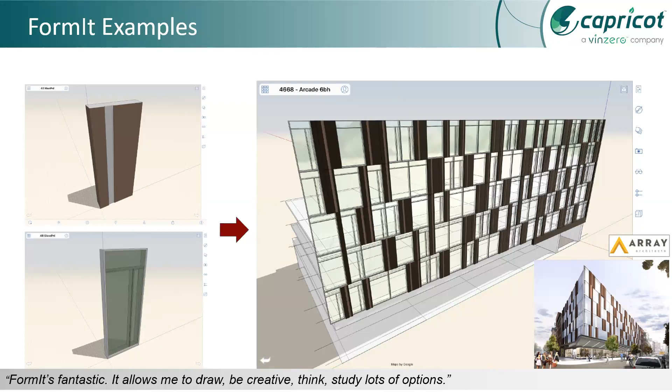Now, FormIt converted to Revit. So even though you can see there's a reverse arrow, clockwise and anti-clockwise, you can interoperate with the Revit model as well as a FormIt model. Right now, people are going to talk about investment areas.

Right before coming to investment areas, I'll show you something which I have made inside of FormIt. So let me come to this. I hope my screen has been visible for FormIt. Yes, it's visible. Okay, thank you. So right now I have come up with the scene exploration.

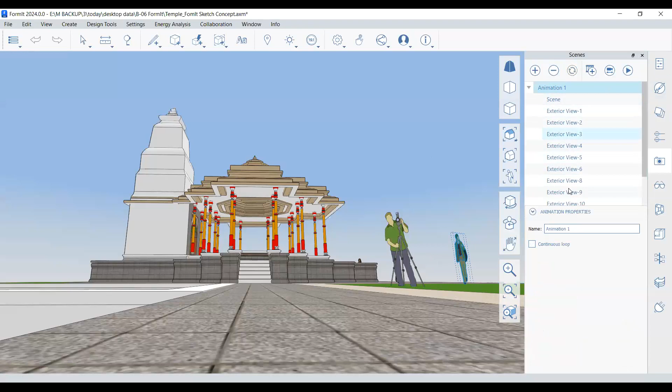So right now I have created one kind of animation, and there's a whole scene. Let me play this one. So there's a lot of changes still pending, but it's good to work around in FormIt and see what kind of changes you encounter with the other team, right?

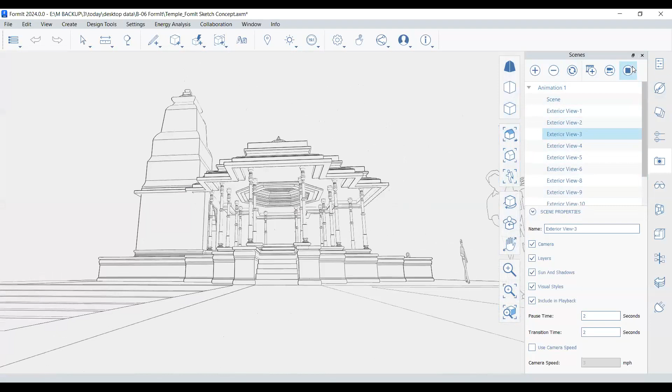So you can find real-time colors, you can switch into monochrome. You can do a lot of modeling over here, and even apply a lot of materials, and you'll find those materials are going to be helpful when you are importing the same model into Revit, right? So that will be the biggest part.

So coming to the view angle, coming to your detailing part, right? Everything has been done inside FormIt. Sometimes people used to say that whether we are going to have a lot of libraries or not. See, whatever extensive library you have with Revit, whatever extensive library you work with in SketchUp, those are going to come over here very easily. You can take your models, your libraries, your furniture, everything you can bring over here. There is no restriction.

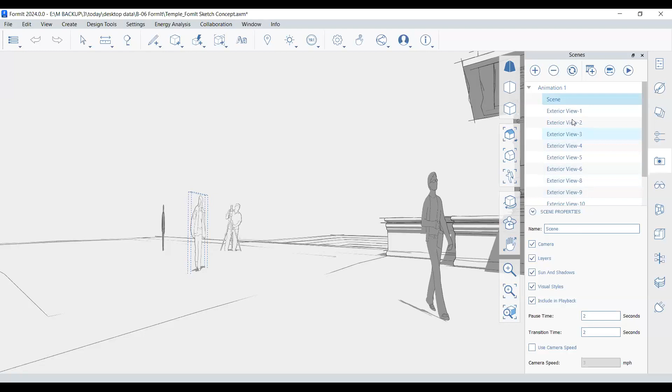I have come up with a lot of examples where people used to say this library has not been attached to this software, why is it so, what is the alternative? But Autodesk is one kind of product which is really good when it comes to interoperability. Right, let me come over here, only scene one, exterior one.

Okay, so coming back to my PPT.

So there is a part of investment areas. Now, investment areas - people are going to think about whether I have to invest my time into FormIt or not. I'll give you here 3 benefits, 3 important benefits where you are going to definitely think over it to start with FormIt.

The first one is workflow, right? See, Autodesk has generated one thread line software, which nowadays has been really popular. If you're working with the management, if you're working with cloud collaboration, definitely you require FormIt because it will be a widely used software for conceptual work.

Then second is analysis. You can't start with the conceptual directly inside Revit. Well, it is not a recommendation. I'm not saying you can't start, but what is the use if you're using a conceptual design inside Revit? Revit is going to be built for the whole detailing process, the construction modeling and construction detailing part. You can start with the conceptual things over there, there is no harm in it.

But what if you utilize conceptual design inside FormIt? There are specific persons targeted for specific tasks, right? So FormIt is going to be specifically for conceptual modeling. Why are we not using FormIt for a conceptual model? That is my concern. You can conceptualize, you can do analysis, you can compute, you can do everything. Another factor is when you work with Revit with a conceptual design, while running the task, there's a lot of library inside it, so when the Autodesk analysis runs, it has to understand the whole model, the whole library.

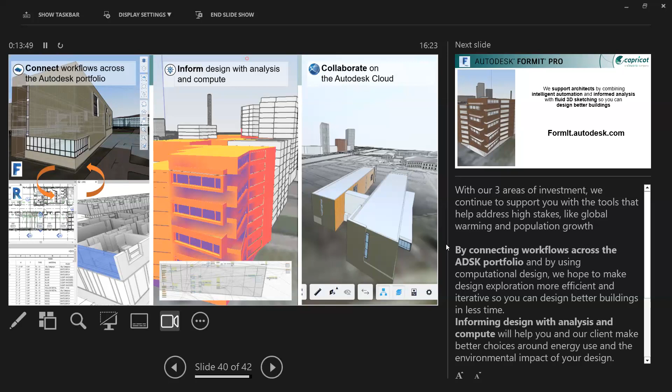One of the queries I encountered in the chat was whether 2D sketches can also be converted into 3D. When you're talking about a sketch to 3D, it won't be possible directly, but a sketch can be imported inside FormIt, and you can extrude those areas using lines and polylines, and after that you can create it. Right now, I haven't come across technology where a sketch gets converted into 3D, but we have to wait for the future.

In the future, this will definitely become possible with AI technology. So thank you so much on behalf of Capricot Technologies. I would request Shoaib sir to share some views.

Most of the questions have been answered already. There were questions about rendering. Rendering can be done through Twinmotion as well. Now FormIt and Revit both support Twinmotion, and it comes with the license of Revit and the FormIt Pro version. Otherwise, FormIt can also be used as a free version.

Those who want to explore FormIt for now can go for the FormIt web version. Just search FormIt web online, log into your Autodesk ID, and you'll get FormIt for free. But Dynamo support will not be there, and energy analysis support will not be there. You can just develop forms there. And if you get the desktop version, you can go for the Pro version.